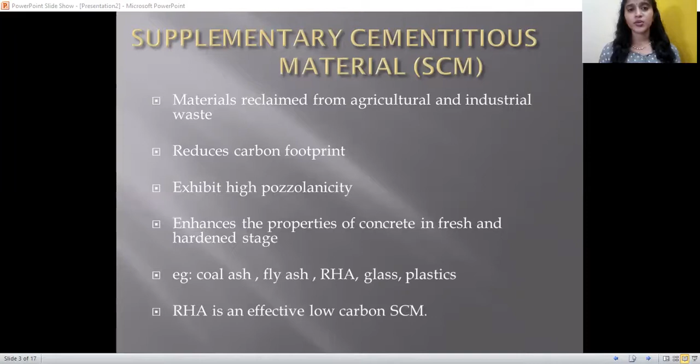In this current scenario, it's quite important to think about alternative low-carbon supplementary cementitious materials which can partially replace the cement. Next is supplementary cementitious material. These are the materials which are reclaimed from agricultural and industrial waste. They exhibit pozzolanic behavior. The pozzolanic materials combine with calcium hydroxide in presence of moisture at ordinary temperature to form compounds which exhibit cementitious behavior. And they enhance the properties of concrete in both fresh and hardened state. Examples are rice husk ash, glass, plastic, silica, etc. Study shows that rice husk ash is an effective low-carbon supplementary cementitious material.

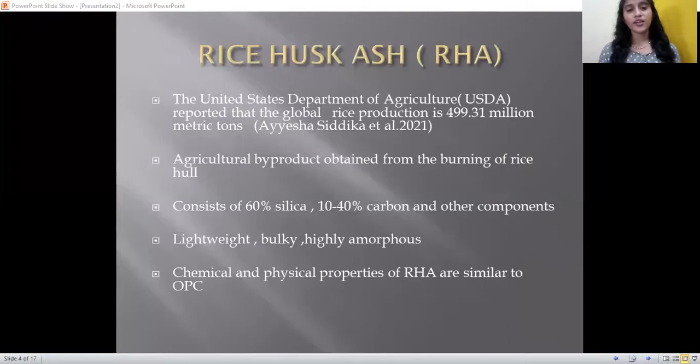Next is rice husk ash. The United States Department of Agriculture estimated that global rice production is about 499.31 million metric tons. Rice husk ash is obtained by burning of the rice hull. It consists of 60% silica, about 10 to 40% carbon, and minor proportions of other compounds like oxides of sodium, magnesium. It's lightweight, bulky, and highly amorphous. Chemical and physical properties are highly similar to OPC. This is rice husk and rice husk ash.

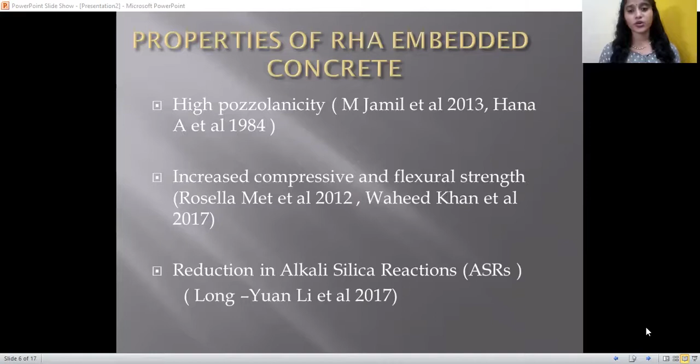Properties of rice husk ash embedded concrete. Study shows that rice husk ash enhances the properties of concrete, and major findings are they exhibit high pozzolanic property because of the fineness and filler nature. The compressive and flexural strength is increased. Durability of the concrete mix incorporated with rice husk ash is enhanced. As a result, a gradual reduction was observed in the values of alkali-silica reaction, chloride penetration, and corrosion rates. So rice husk ash is a green, sustainable and environmentally friendly solution.

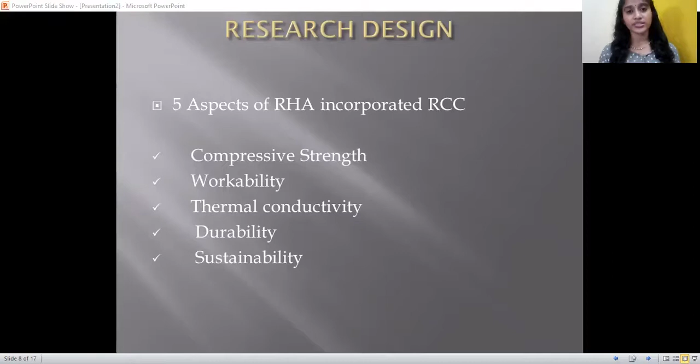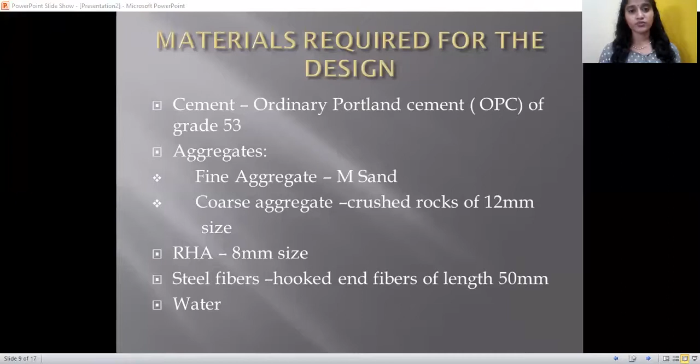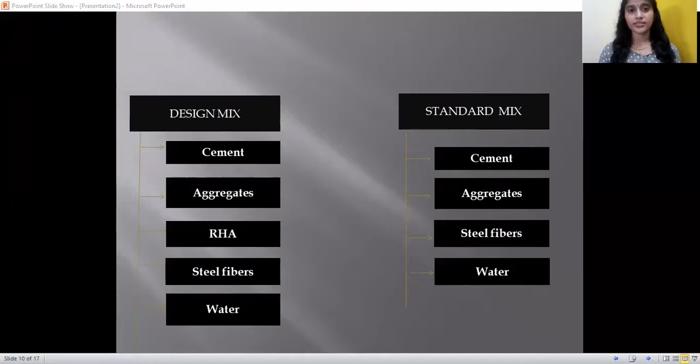This is about the research design. Here the properties like workability, sustainability, compressive strength, durability, and thermal conductivity of the reinforced cement concrete incorporated with rice husk ash are evaluated. Materials required for the design: Ordinary Portland cement of grade 53. Aggregates are fine aggregate M sand and coarse aggregate crushed rock of 12 mm size, rice husk ash of 8 mm size, then hooked steel fibers of length 50 mm and water. For the design purpose, we prepare a design mix and a standard mix. The design mix consists of cement, aggregate, rice husk ash, steel fibers, and water, while the standard mix consists of cement, aggregate, water, and steel fibers. This is the rice husk ash and steel fibers taken for the experimental purpose.

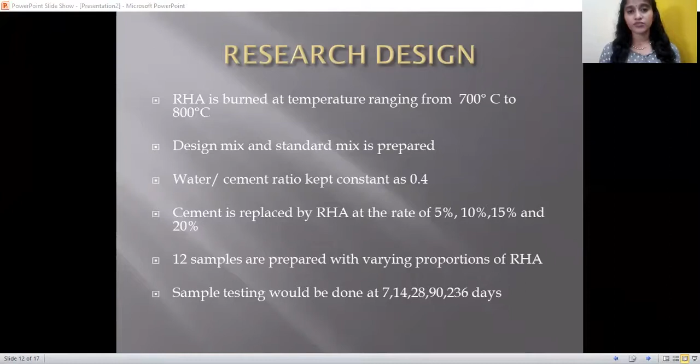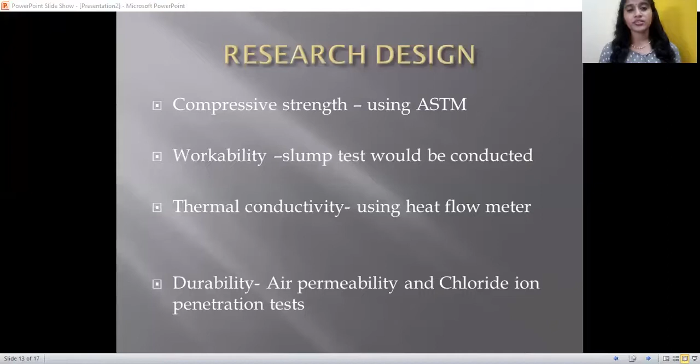This is about the experiment. Here the rice husk is burnt at a temperature ranging from 700 to 800 degrees Celsius. The water cement ratio is kept constant as 0.4 for all the mixes. 12 samples were taken with varying proportions of rice husk ash. It is replaced at the rate of 5%, 10%, 15% and 20%. And samples were tested after 7, 14, 28, 90, and 236 days. Various tests were conducted to determine the properties like compressive strength, workability, thermal conductivity, and durability. Using American Society for Testing and Materials, the compressive strength can be found out. Slump test is conducted to determine the workability of the samples. Using heat flow meter, thermal conductivity values are obtained. Air permeability and chloride penetration tests are done to determine the durability.

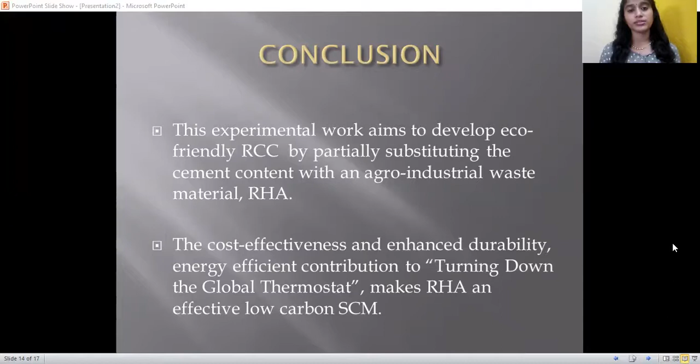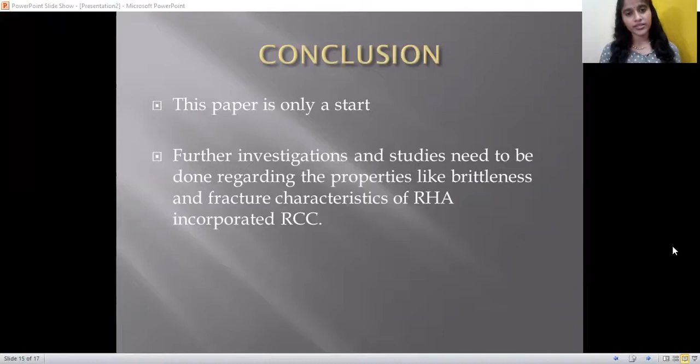Conclusion. The cost effectiveness and enhanced durability coupled with energy efficient contribution of turning down the global thermostat make rice husk ash such a significant contributor to a holistic approach by the concrete industry to the global issue of environmental sustainability. This paper is only a start. Further investigations need to be done to determine the properties like fracture and brittleness characters of the reinforced cement concrete incorporated with rice husk ash. These are the references.